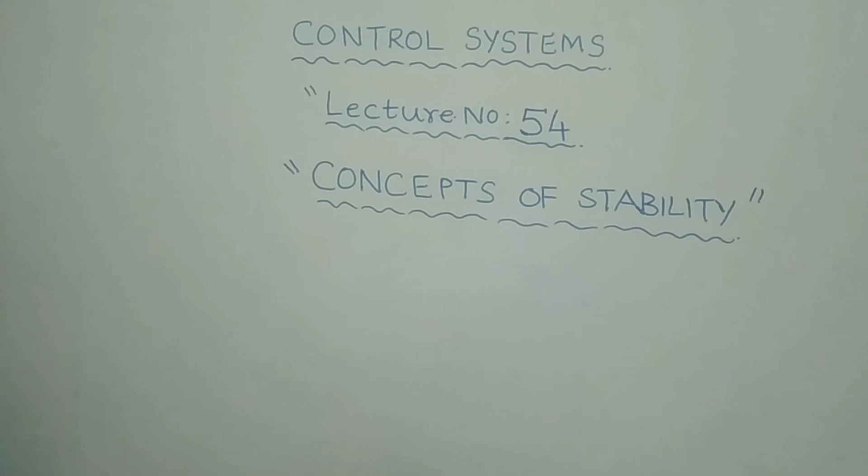What does stability mean? Why is it required in a control system, right? And what are the various techniques that can be applied to determine or estimate the stability of the given control system, right? This is another beautiful, very interesting, very important topic that we need to learn and consider, right? I hope you definitely will enjoy this. So let us go into the concepts of stability.

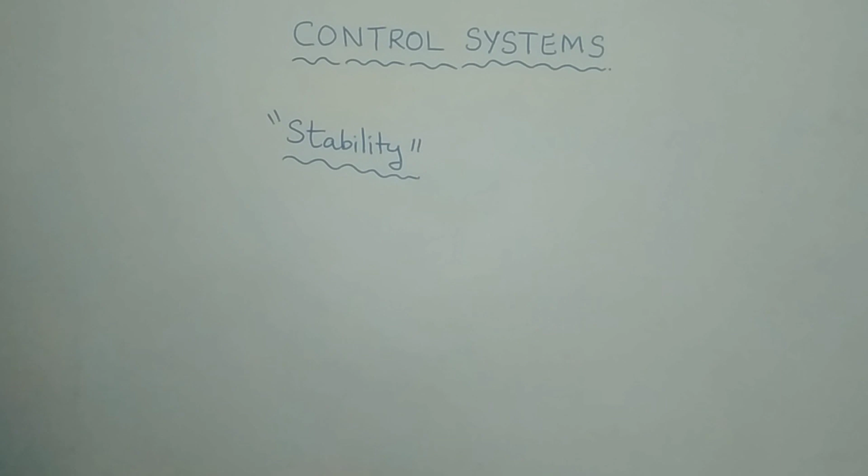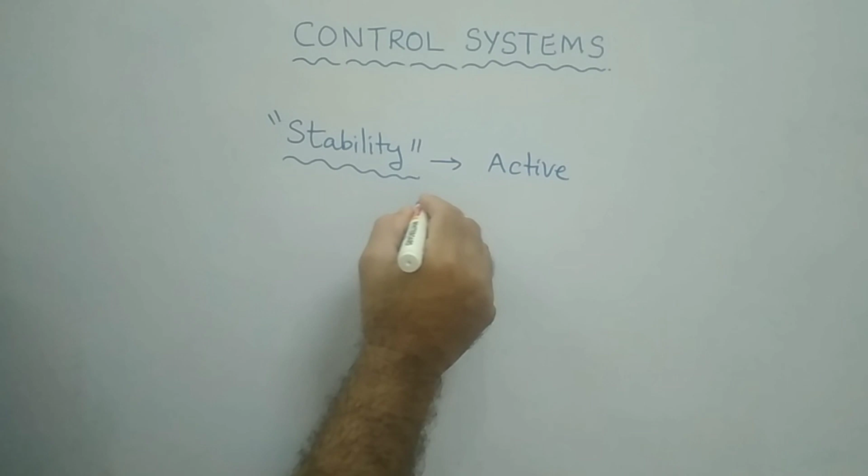What does stability mean actually? What do we mean by stability? Stability means being in an active condition. That is the meaning of stability. Stability means being in an active condition. Being active means being responsive. So being in active condition and then being responsive.

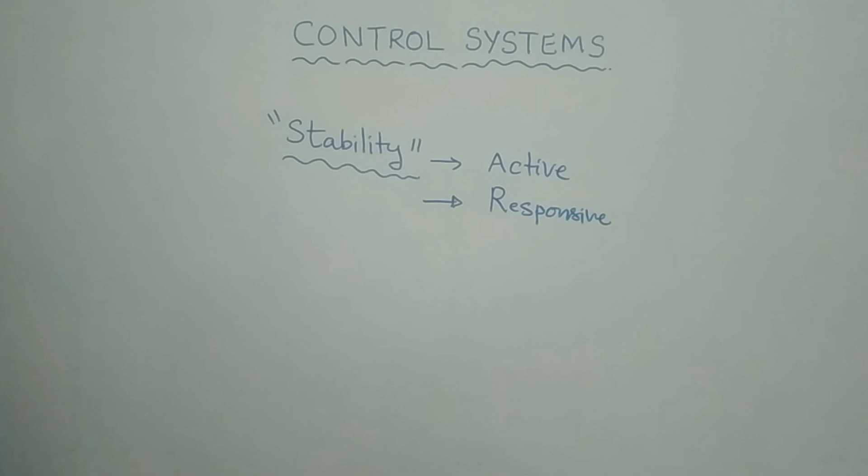That is what stability is. So any system, if it is said to be a stable system, then definitely that system must be in active condition, means it must be in on condition; it should not be in off condition. So if the system is in off condition, then we will not expect anything from it at the output stage, right?

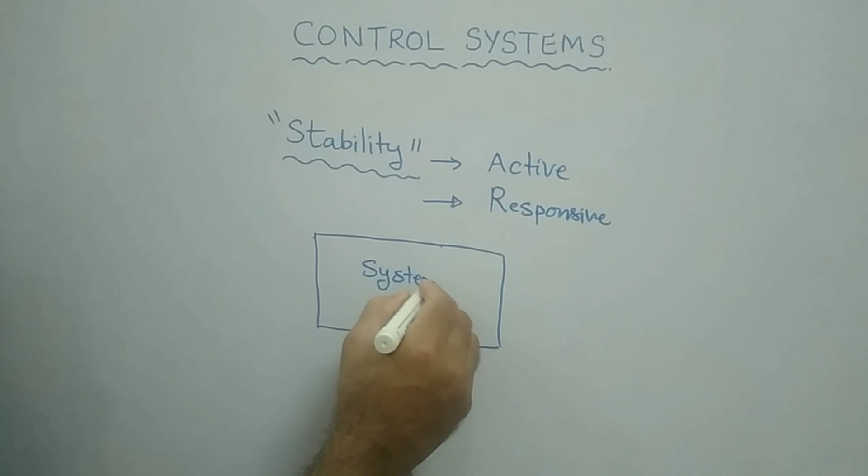Though you apply the input, say for example, for your understanding I will write this is a system. Normally we can represent a system like this, right? For this, say you are giving some input r(t), and normally we must get our output as C(t), no? Normally our output is C(t) in general, as far as our control system subject is concerned.

Say, for example, you have put this system under off condition. You have switched it off. You are giving some input here, but the system you kept in off condition. What will you get here as output? Nothing, zero, no output. In this case, this is called inactive. The system is called to be in inactive condition.

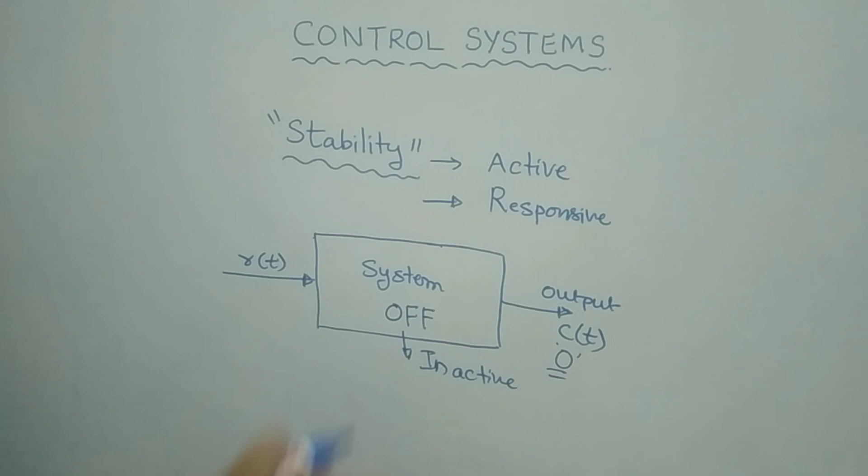Inactive condition, or otherwise also called unresponsive or not responsive. You will not get any response at the output because you put the system under off condition. And in this case, you can call it not a stable system. It is unstable, you can say. It is not stable in the sense that only once you get some output for the given input can you tell about the stability of the system, right?

So once you put the system in off condition, there is no question of discussing the output, nothing. Clear? That is what sometimes happens, knowingly or unknowingly. Normally we will do something after switching off the actual system, and finally we'll feel that we have not got the output. Yes, it will happen normally, but as far as our subject is concerned, right?

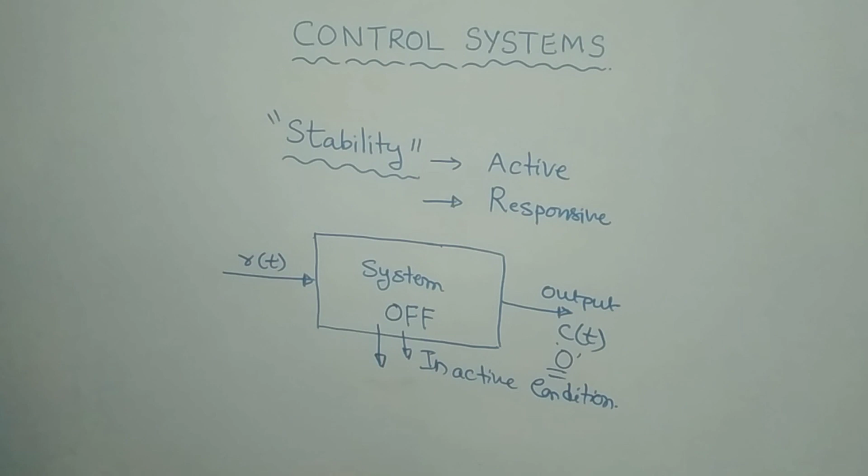So stability is a very important characteristic that needs to be considered for any control system, and moreover, this concept of stability definitely belongs to the linear system. Most of the time this stability is employed for linear systems, right? That's why the system is also called a linear time invariant system, or simply you can call it a system. That's it, right?

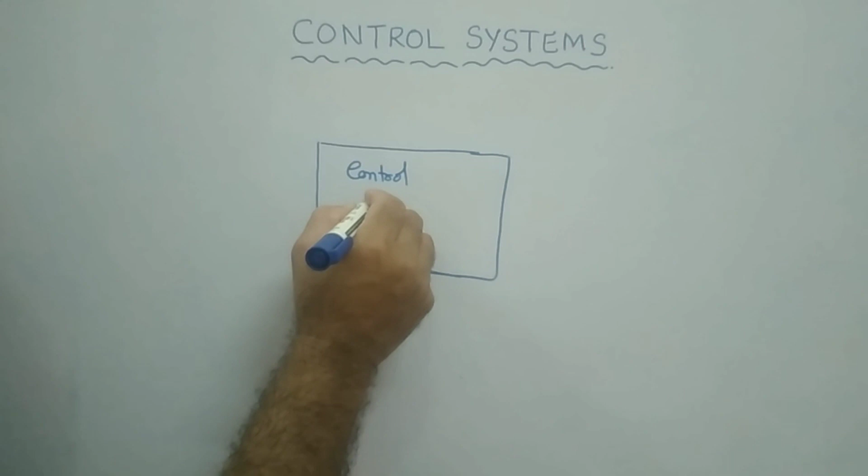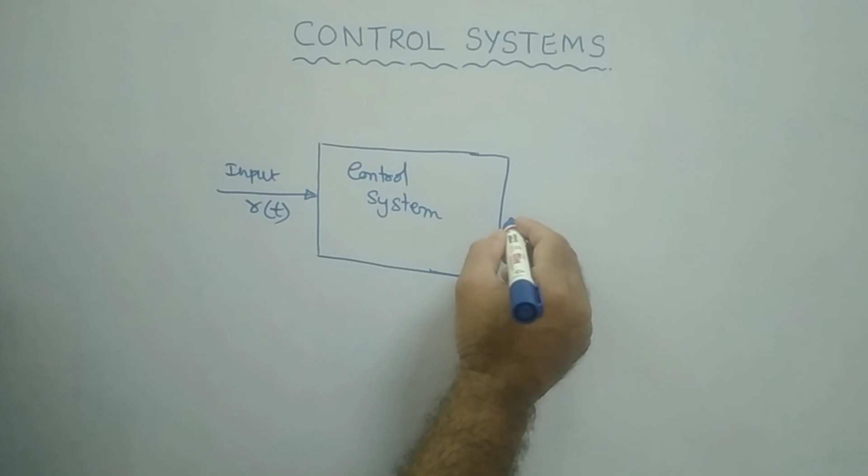Let us consider this diagram again. This is our control system, let us say. This is my input, called r of t. This is my output, and I will represent it as C of t. Clear? And also, input is also called excitation. E-X-C-I-T-A-T-I-O-N. Excitation. My output is also called response. This you already know.

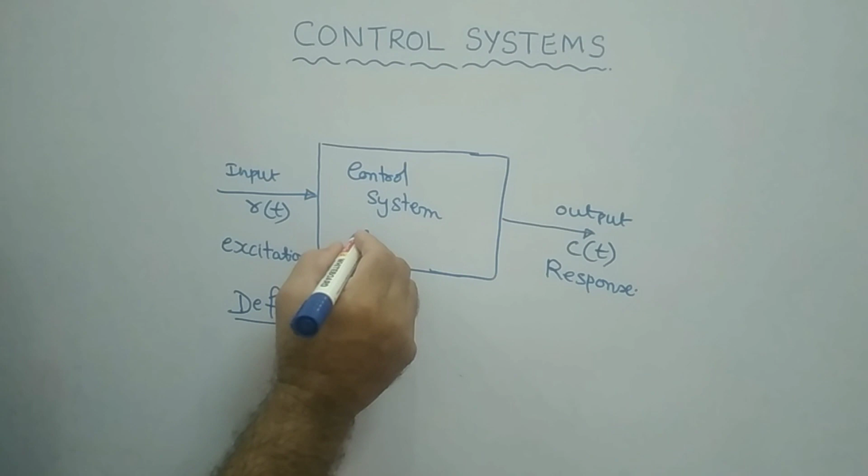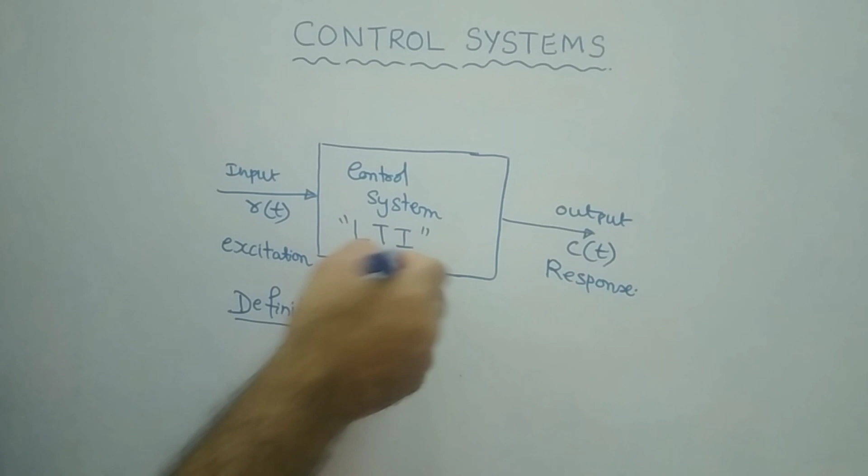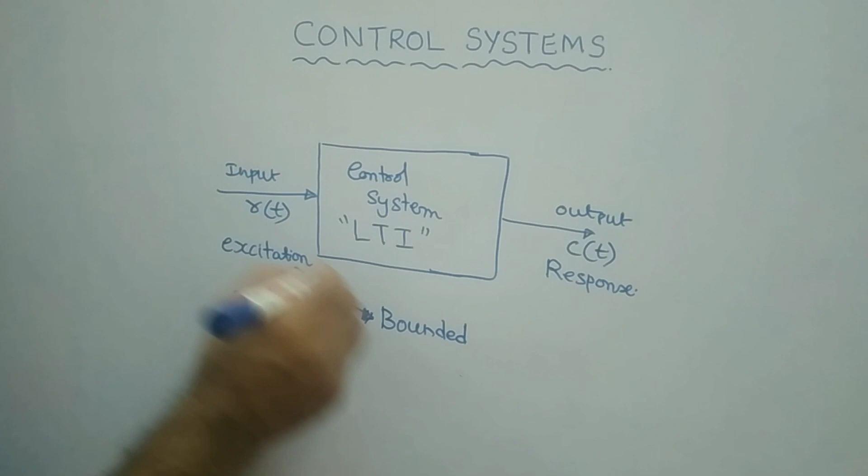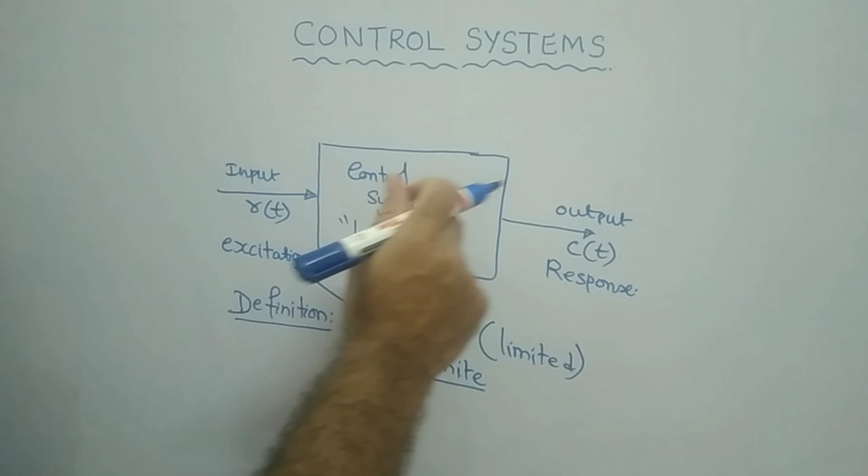So the very important definition of stability is: for the control system, which most of the time we will consider a linear time invariant system, or simply a control system, for any given control system, if the applied input is a bounded one, bounded means limited, or otherwise you could call it finite. It should not be infinite, it is a finite value. Therefore, if the applied input is a bounded one, then the system should give a bounded output. You will get bounded output.

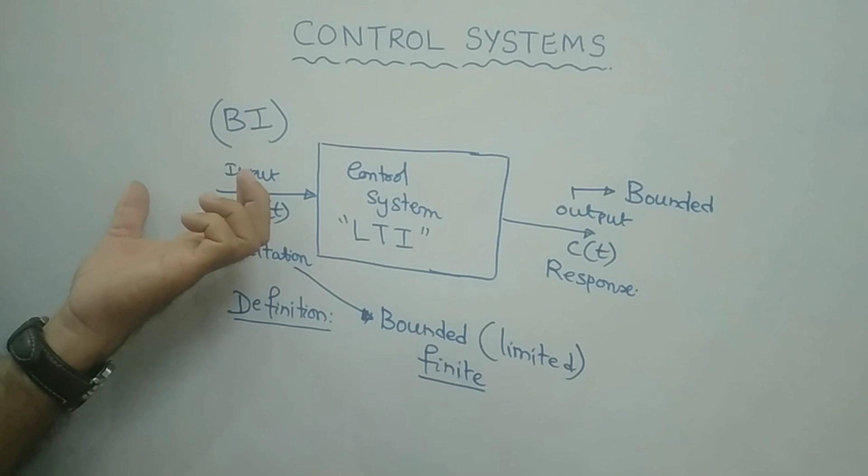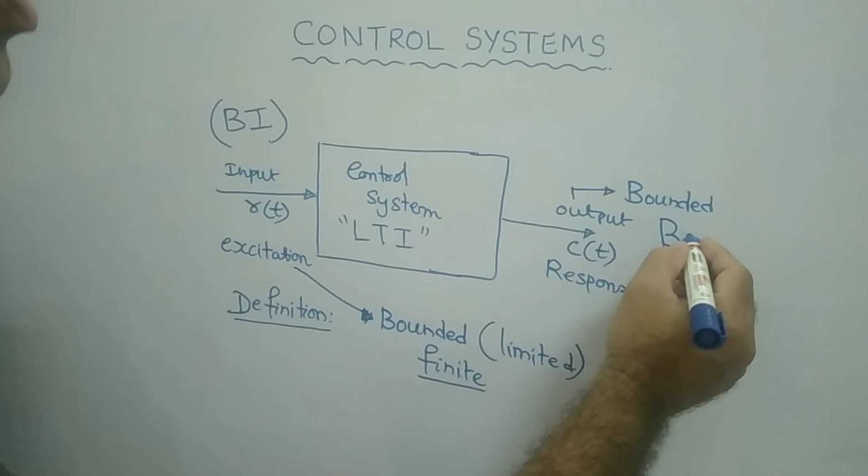So if the input is bounded input, most of the time written as BI, if whatever you apply at the input stage of the system is a bounded one, a limited or finite one, then the system gives at the output a bounded output, BO. So if the input is limited, then obviously your output is also limited. If the input is finite, then definitely your output is also finite. Then only you will have a linear relationship between the input and the output. A proportional relation must be there between input and output. That is what linear means. That is why the linear time invariant system came into the picture, and why we are all studying it.

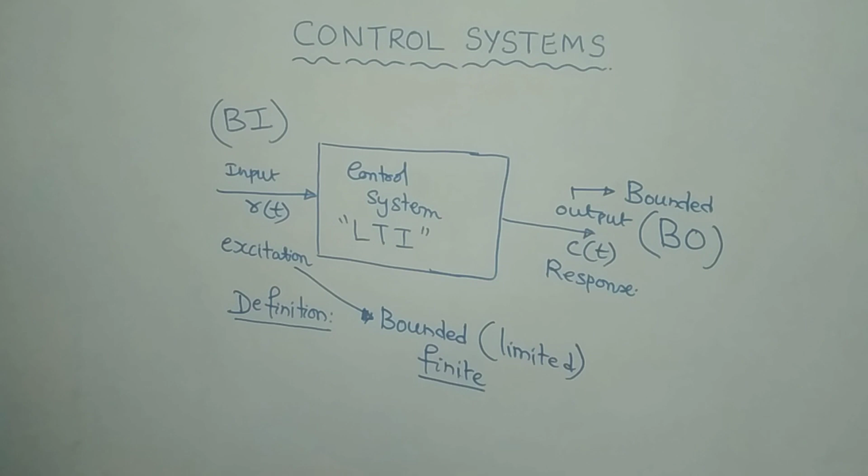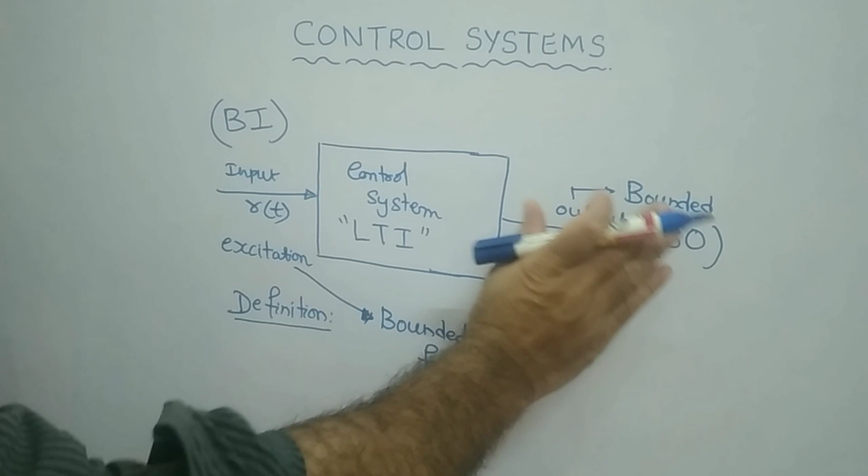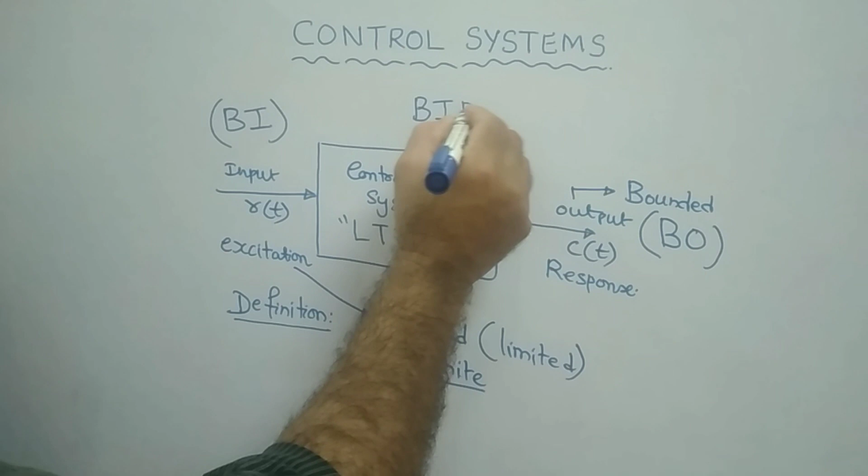Clear? Therefore, the applied input must be a bounded one, means a limited one. Then you will get the bounded output, means the limited output. Then the system is called a bounded input, bounded output stable system, or simply BIBO stable system. Bounded input means a limited one, a finite one. If the input is finite, your output is also finite. If it is limited, output is also limited. That is the condition required in order for the system to be stable. That is the very first and foremost condition.

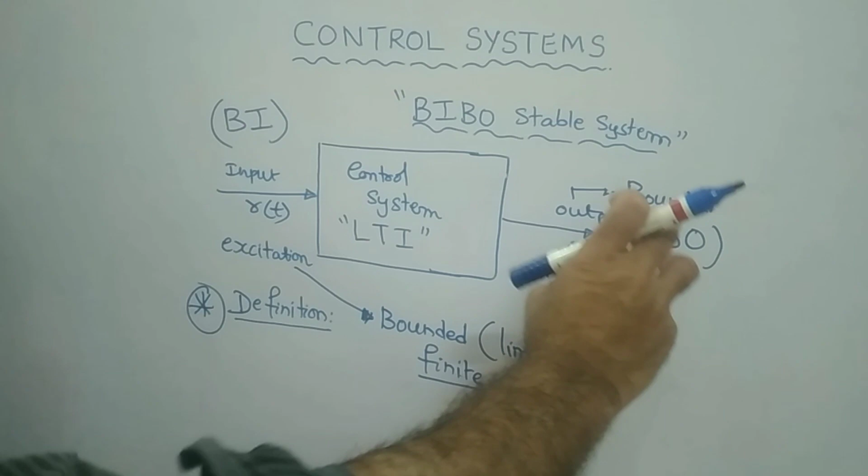Sometimes what will happen, say the input is bounded, means you have applied a limited or finite input to the system. But unfortunately, the system will provide an unbounded output, not bounded. Instead of bounded, you will get unbounded, uncontrolled. The input is controlled, but you got at the output of the system uncontrolled output. Then the system is called an unstable system. Clear? That is another very interesting and important definition to be remembered.

And then one more important condition is that in the absence of the input to the given control system, in the absence of the input means the input is zero, you have not applied any input to the system, then your output tends to zero.

Means definitely you should not get any output. That condition also should be satisfied, right? So these are the conditions basically. Therefore, this is a very important definition, BIBO stable. That is the definition of a stable system.

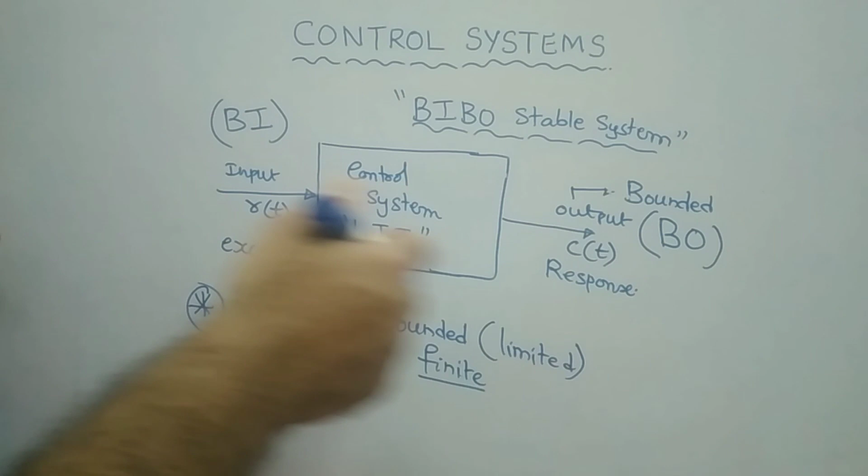Because in control system, it is a very important and interesting parameter to be considered, whether the system is giving a stable output or not. That is very important. If the output is not stable, what is going wrong with the circuit? As we have discussed in our earlier presentation, a system is a group of so many interconnecting or intermediate subsystems. Very small systems will be there in between.

Therefore, for any reason, if any intermediate stage goes wrong, then you will not get the proper output. Then you need to check and cross verify stage by stage. Therefore, you can easily trace out where the thing has gone wrong, then you can identify it, you can rectify it, and finally you will try to get the desired output at the actual output stage of that particular system.

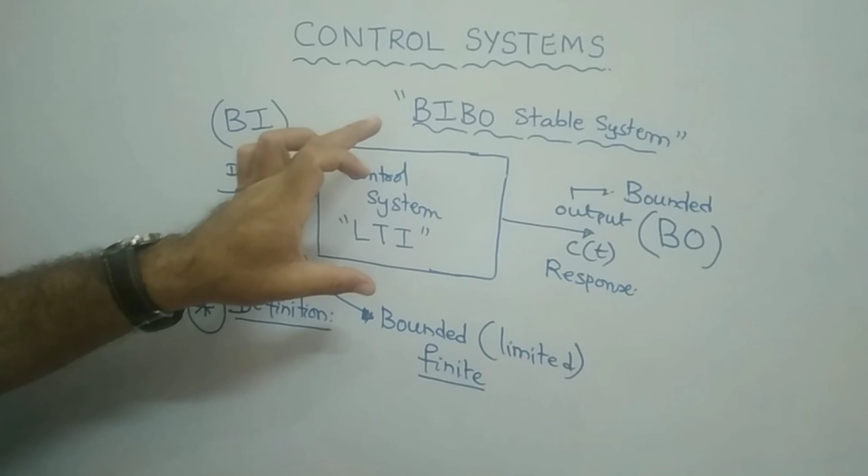Clear? That is what stability means: the system must be under stable condition, then only the proper output will be obtained. So the stable system gives the desired output, noise free. I mean, you will get less noise. Some percentage of noise will be there at the output, but

our topic is not regarding noise here. It's not the main objective here, but to determine whether the system is stable or not. That is our aim under this topic, right? Therefore, this is the basic definition of stability. And then what are the criteria? Are there any techniques, procedures, or methods to determine the stability of a system?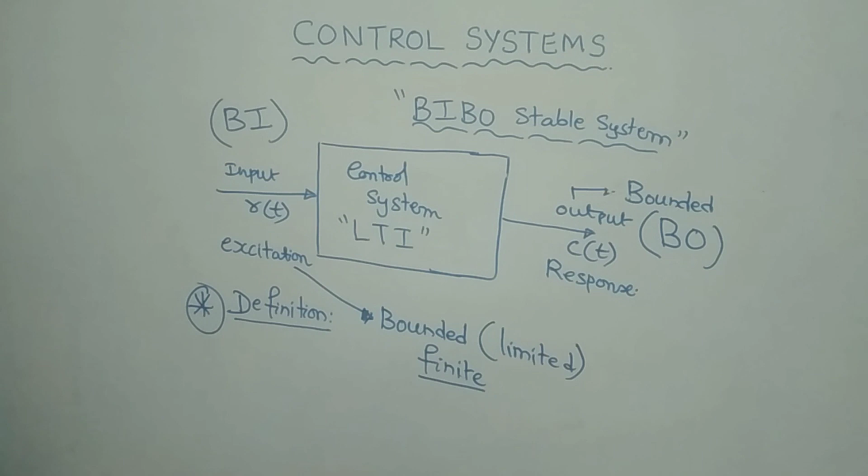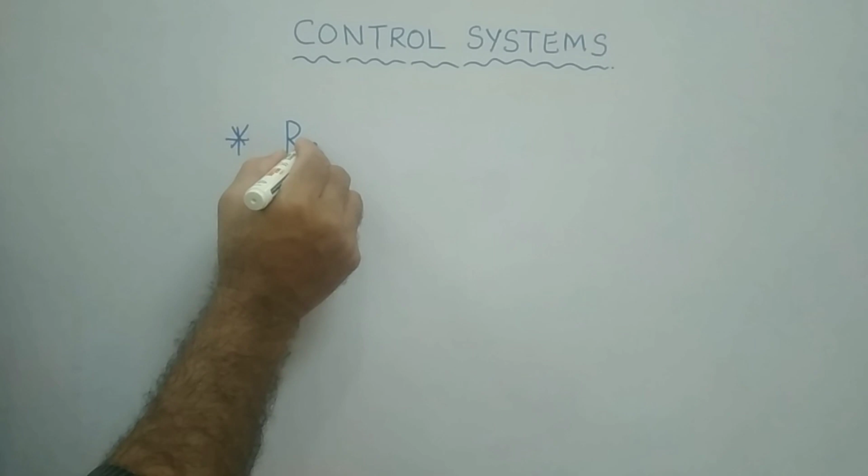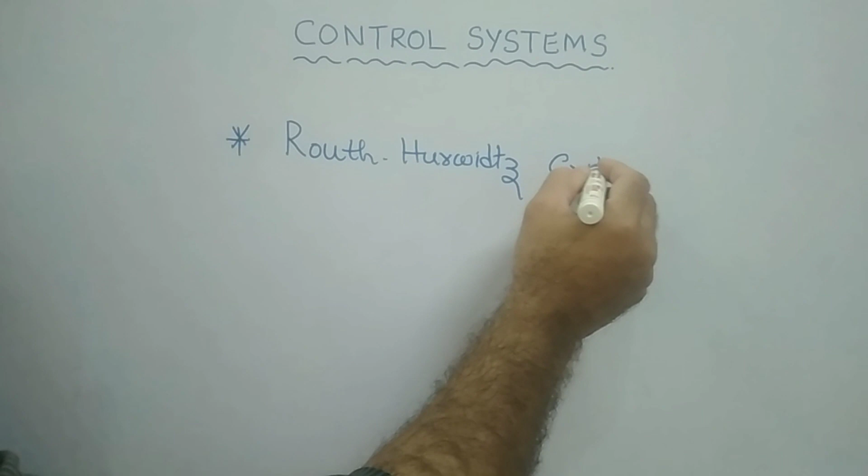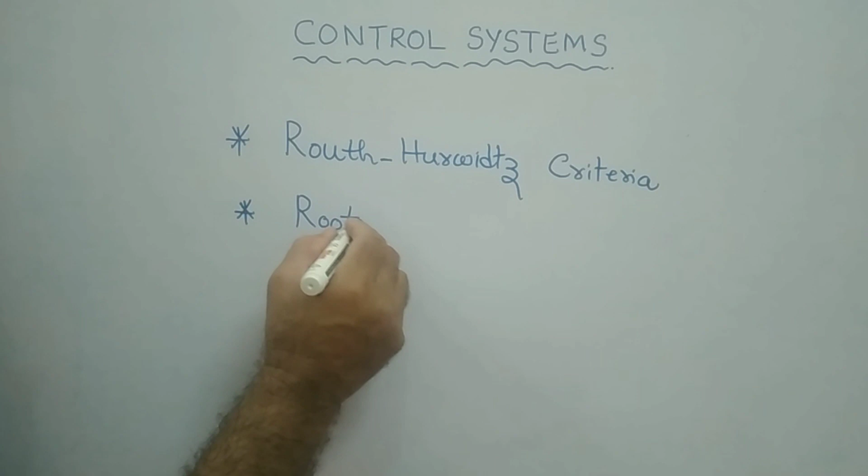Of course, there are two very beautiful methods employed to determine the stability of the system. There are two important methods. The first one is Routh Hurwitz criteria, R-O-U-T-H. Routh Hurwitz criteria, or Routh Hurwitz technique, whatever you call it. The next one is root locus technique.

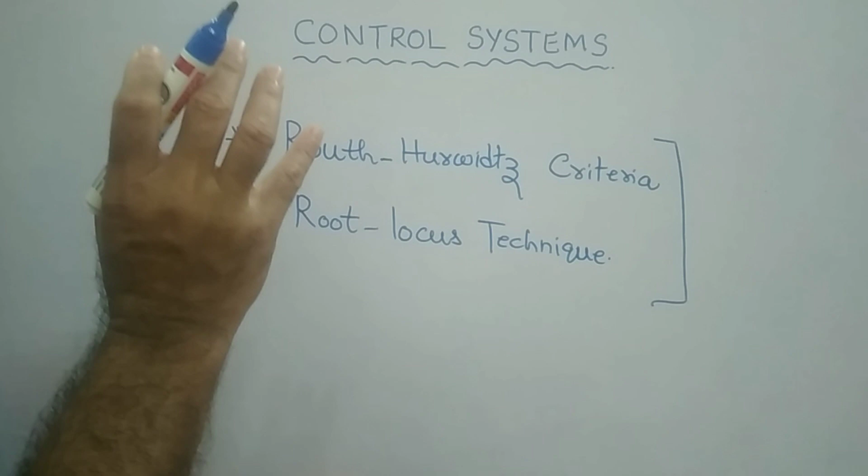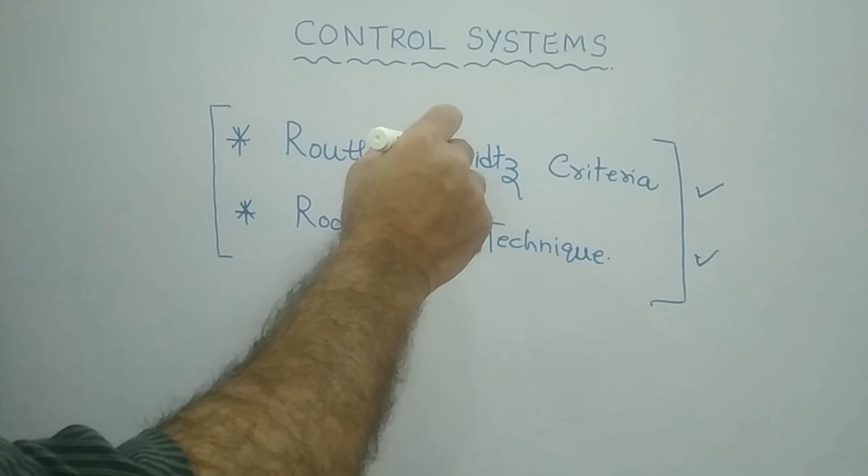Root locus technique. These are the two beautiful and important techniques available to determine the stability of a given system: Routh Hurwitz criteria, and the second one is the root locus technique. By using these two techniques, we will find out the stability of the given system.

And again, there are different types of stability: conditional, marginally stable, or limited stable. These are the varieties of definitions depending on the system's transfer function, right? So this is the introductory presentation regarding the concepts of stability, and we will finish off this presentation here today, and then we will continue with elaborate information about the Routh Hurwitz criteria first, and we will see there is a set of rules to find out the stability by using the Routh Hurwitz criteria.

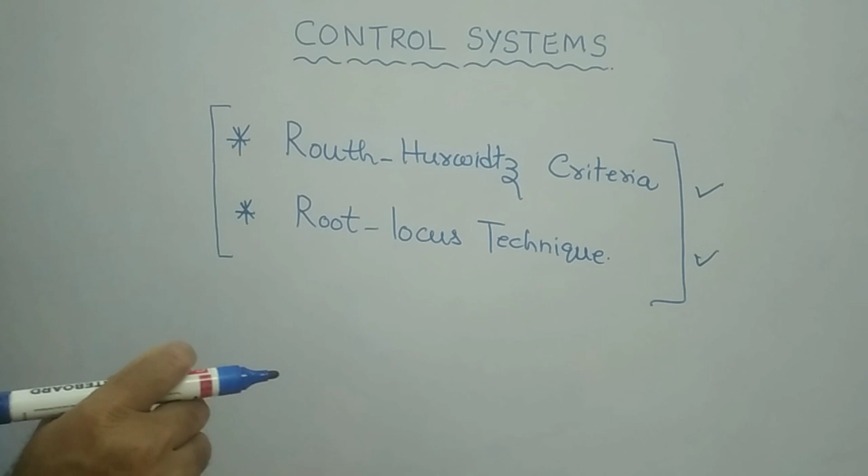We will see in detail about Routh Hurwitz, and we will do some examples, and later on we will move to the root locus techniques. These are the two very important methods, definitely in GATE examination and in UPSC IES examinations also, and obviously in your academics, in your university semester or end examinations, they will definitely ask from these two.

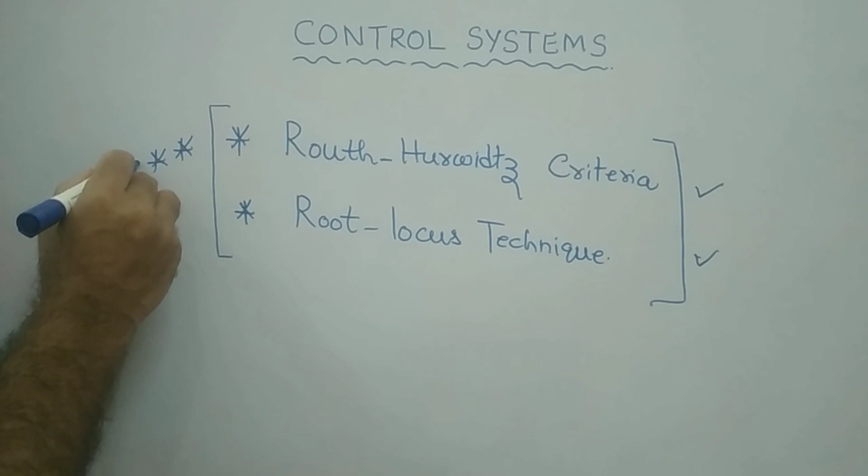But from the competitive examination point of view, you definitely will get questions from this topic. These two are very important topics, and we will see them in detail in our subsequent presentations, right?